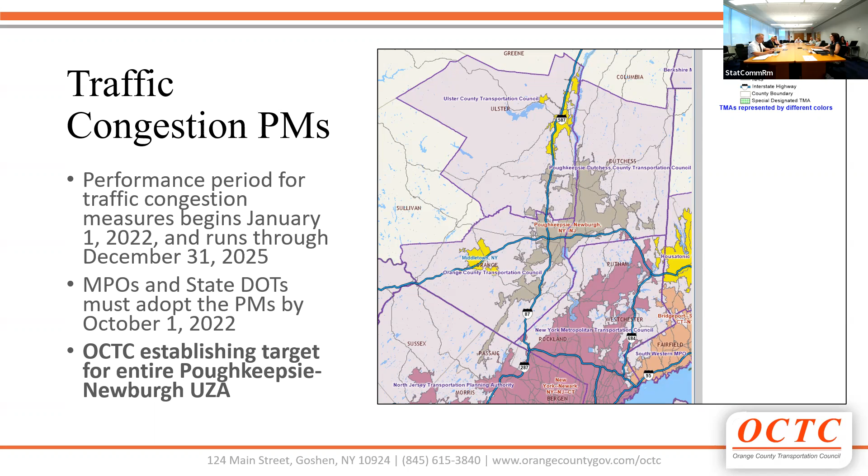And we are the only MPO adopting these for the entire urbanized area. So we coordinated with NYSDOT and the 3 MPOs that touch the boundary of the urbanized area, which are North Jersey Transportation Planning Authority, NJTPA, Ulster County Transportation Council, and Dutchess County Transportation Council. We met and talked about the approach and the draft, and they supported and felt comfortable with what we're presenting today. So the baseline is 2021, and then we have 2-year targets for 2023 and 4-year targets for the end of 2025.

The next measure is the peak hour excessive delay per capita measure. For this, we use the Avail Labs tool that uses NPM RDS data—I can't remember what that stands for—along with volumes from the HPMS, vehicle occupancy from the American Community Survey, and population also from the 5-year American Community Survey.

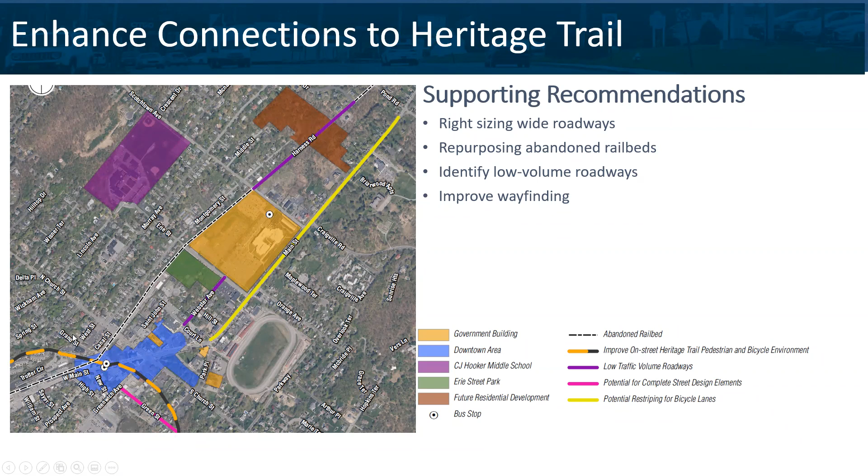And then you have more general policy recommendations, really working to adopt policies that promote pedestrian and bicycle amenities. So for instance, as new developments come online, are you giving credits to developments having bike parking, showers, travel demand credits to really reduce vehicular demand and allow people to bike and walk to work? And then even just streamlining the process to install a bike rack in front of someone's storefront—making it a very simple process—the quicker you get these bike racks out there, the more people will bike to work and park at work.

Next up, we're going to talk about some of the corridors. We did specific looks at the Route 17M corridor in Middletown, Route 211 in Wallkill, Route 94 in Chester, and then two intersections, the Route 17M Brookside in Chester, and Route 94 Main Street in Warwick. In general, whether you're on these corridors or other corridors throughout the county, there are recommendations we have that really can travel anywhere.

One is really encouraging places to adopt a complete street policy. This is important—one, there's funding opportunities when you have a policy in place; two, it sets the standard that as future projects or developments come online, there's an emphasis on making sure that they contribute to the complete street network within their city, town, or village. And within the report, Orange County actually has a really nice model write-up, so this is not something you'd have to do from scratch. There's actually a model policy that they put together, so if of any interest, you can reach out to OC staff and they can help you set up that policy.

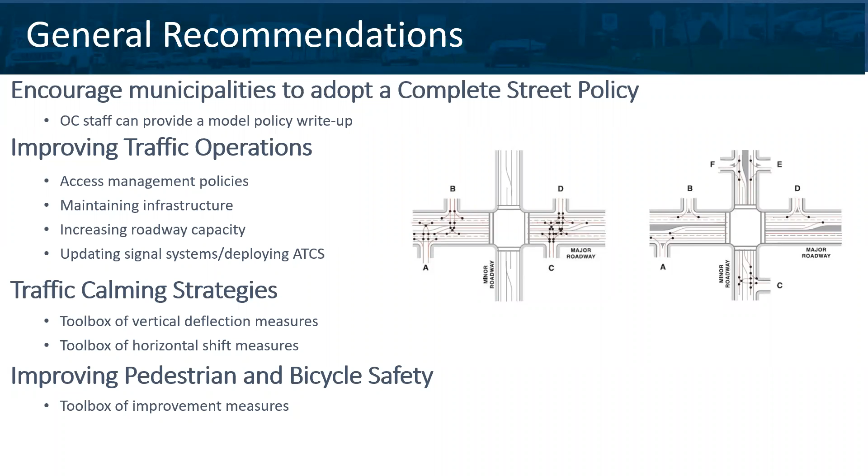And then within the report, you'll see traffic calming strategies, whether it's vertical deflection measures or horizontal measures, and pedestrian and bike safety measures. Again, it's all in the report—a toolbox you could pull from and implement on corridors throughout the county.

Just a couple of specifics—Route 17M and Dolson Avenue, we've highlighted where our study area was for Dolson Avenue. This was interesting because right now there's a lot of work going on: Dolson Avenue has a traffic operations improvement project and some sidewalk projects. So for this one, we really looked at where we could improve or build upon what's being done right now. One recommendation is, along that corridor, really encouraging shared driveway access as new development comes online, to reduce the number of driveways and friction along the corridor.

While there are projects right now to build sidewalks on the corridor, there are still gaps that remain. A couple we've noted are on Academy Avenue between Grant Street and Benton Avenue, and Academy Avenue between Benton right up to East Main Street. You can see in the images where there's a lack of sidewalks. There's also a stretch between Dolsontown Road and Campbell Plaza where there are no sidewalks.

Another big issue with this corridor is maintaining and updating pavement markings. A great example is in images from a couple years ago where a right turn had a through lane, a through arrow, a right arrow, a through arrow, which could cause confusion for drivers. These have been updated - the same image on the right shows more of this MUTCD standard through right turn markings.

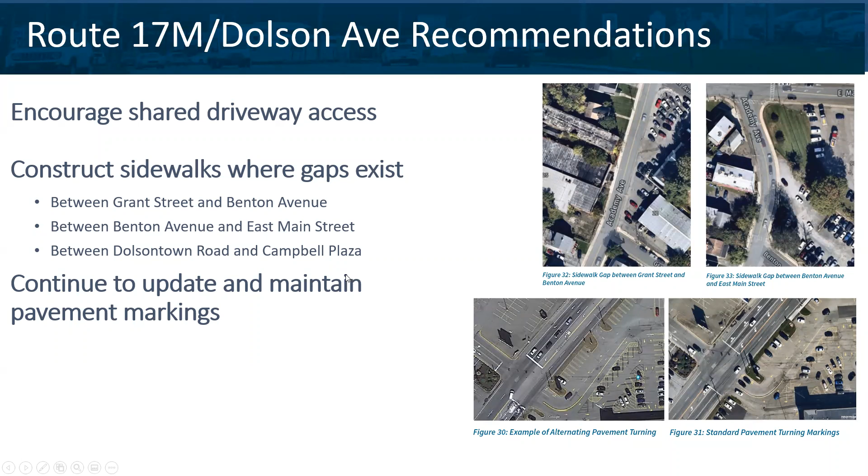Route 211, again, looking at from the Route 17 interchange to Goshen Turnpike. There are places along the corridor where there are no sidewalks. However, if you go out there, you could see what I would call 'goat paths,' where you can see there are people walking. So there's a desire to have these sidewalks in place.

Route 211 is a state road, so there will be some coordination between the state and the county. But even as highlighted in the picture, if you go out there today by the Route 17 ramps, you can see where people have walked, and we observe people walking along this area. That shows the desire for these facilities. There are also empty parcels along 211 that, as they get developed, present a great opportunity to start providing sidewalks on the project site frontage. And similar to the Route 17M corridor, we're encouraging shared driveways for adjacent land uses.

Along 211, we also looked at some of the intersections to see what we could improve. One was the 211 Galleria Drive intersection. Today, there's one left turn lane and 3 through lanes, and while not shown in the image, those 3 through lanes eventually neck down to 2 lanes.

We also noticed there was a heavy left turn up onto Galleria Drive. So one idea was converting one of those through lanes to a trap left turn lane, giving 2 left turn lanes and 2 through lanes, which would match up where the neck down occurs. This also creates at least a pedestrian median to facilitate new pedestrian crossings from the hotels and residential uses down to shopping and then transit.

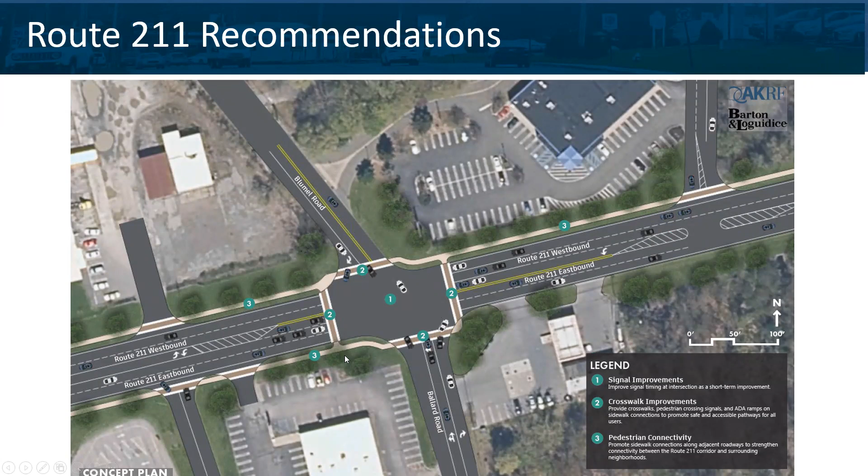At Ballard Road and 211, a lot of this involves both signal timing improvements and new crosswalks and sidewalks that we're trying to construct along the corridor. The function in terms of the turn lanes remains the same, but we're adding these pedestrian amenities along the corridor and improving signal timings.

At Goshen Turnpike, one problem we see is on the eastbound approach - today it's a shared lane, and the left turn will typically block through and right turn traffic. There are new developments coming online in this southwestern quadrant where we have opportunities to widen the roadway to create that left turn pocket.

New pedestrian facilities include sidewalks, crosswalks, and ADA ramps. At this deli, there's a lot of vegetation we've noticed on the corner, and when vehicles were taking a right on red, it really inhibited their sight distance. So we need proper sight distance at all 4 corners, particularly at the deli - again with sidewalks, crosswalks, and added capacity through its own left turn lane and a through right turn lane.

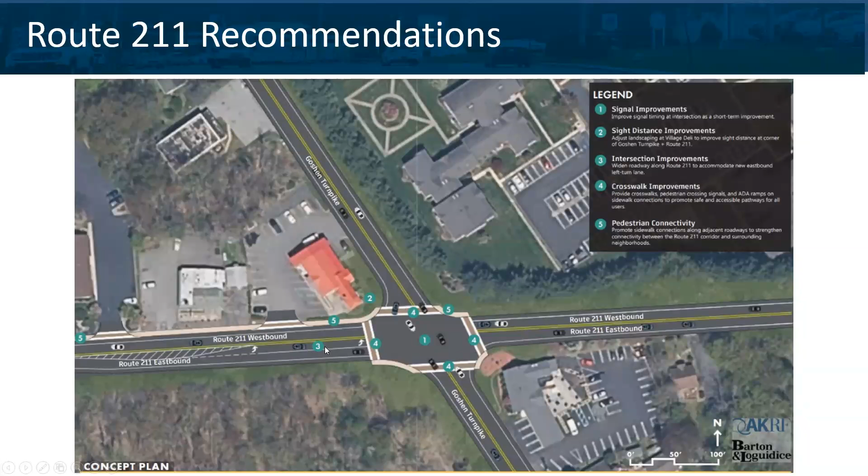A lot of times you use rectangular rapid flashing beacons, RRFBs, to make sure it's a safe crossing from one side of the street to the other.

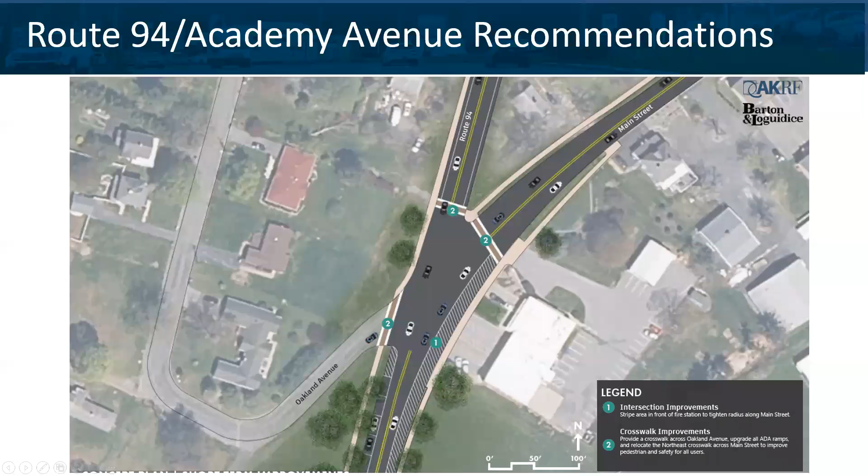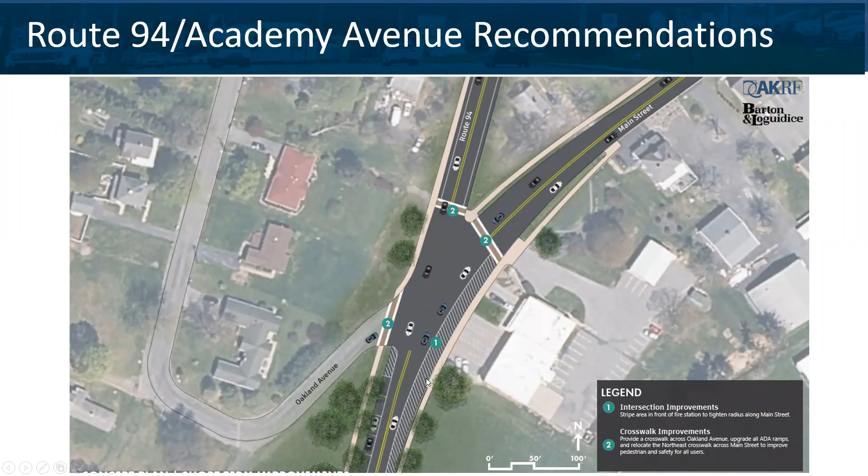So what we propose would really be restriping to direct traffic toward a slower right turn, giving better visibility for pedestrians as they cross Main Street, plus additional crosswalks on Oakland Avenue. But again, the big thing is restriping it so as not to inhibit fire truck access while still slowing down vehicles. You could take this a step further with multiple curbs too, but at least for the first low-cost option, you can do it through striping.

To go to some of our specific intersections, one is 17M at Brookside Avenue in Chester. Today, Lehigh Avenue comes in at this angle - you can almost see it in the aerial - where you have this very funky high-speed right turn to left turn, with a short distance between the two intersections. We saw driver confusion about where to go. So in this case, what we would do is realign Lehigh Avenue to turn and connect into 17 further to the west.

We also noticed that the bridge could use some repair - there's potholes, there's cracking. As we talked about earlier, any infrastructure improvements or maintenance are really important to keep traffic flow consistent.

Did you guys look into roundabouts?

We didn't look at a roundabout here because where this came in, it was still at an awkward angle where we couldn't get the roundabout to work. We did not look at roundabouts separately for these two. We do have trucks in this area, so we couldn't keep the roundabouts tight - it'd have to be a pretty large roundabout with probably some truck aprons. So we avoided the roundabout and left them as standard intersections, but further apart. Again, heavy truck traffic in this area, really no pedestrians, but where these came in, it was tough for us to get the roundabout to work with the trucks.

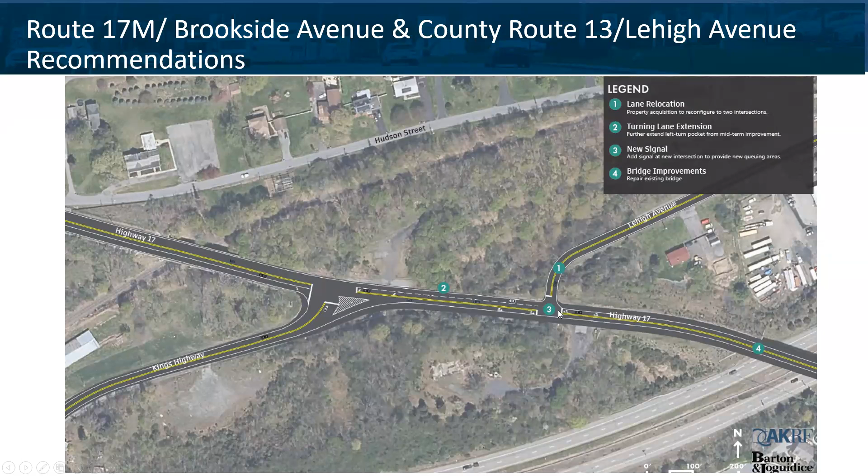And then Route 94 and Maple Avenue—there's actually a plan already in place by State DOT to improve this intersection, including crosswalks on all three locations. But today there's still this pork chop high-speed right turn. You can see where this green area is: there's a right turn that comes in front of the Historical Society building and continues, and there's only one lane for left and right turns.

So under this, building off of the state's improvement—and they were receptive to this—is creating more of a T intersection. Instead of the high-speed right turn that yields, it becomes more of a standard T intersection. You have opportunity for open space in front of the Historical Center, but now with shorter crosswalks and more traffic capacity for left and right turners. It just continues to build off what State DOT is already planning.

I know that was a lot very quick, but we want to go over one other section. We can always return to these corridor improvements.

And lastly, transit recommendations—there are two categories. One is the Middletown area. The recommendations dealt with expanding to accommodate hybrid or flexible demand-responsive service, but a lot of it really needs more post studies given what COVID-19 has done to travel patterns. We need to understand how people's work commute and mode share has changed, and whether what's there today for transit is competitive to driving.

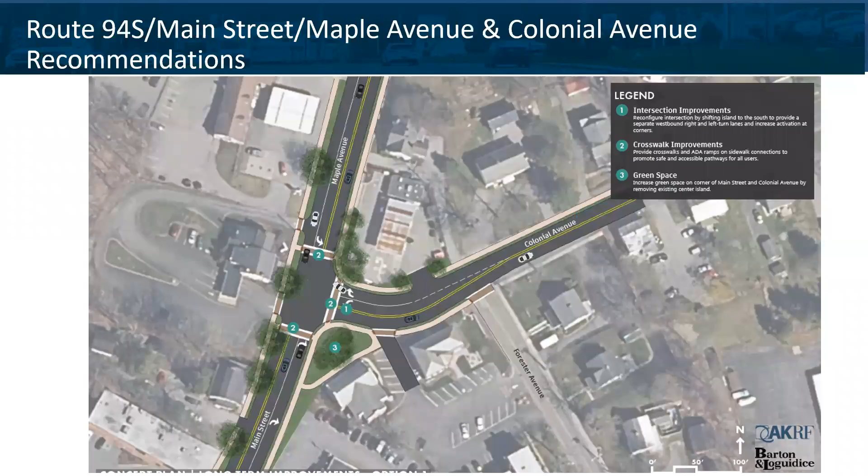Mike, thank you so much for that presentation. Again, I want to thank the Orange County Transportation Council, the Orange County planning staff for working with AKRF and the other consultants on this project. There's a lot of really good recommendations coming out of it.

One thing I'll mention before we start with questions is we're already starting to implement some of the recommendations. Most importantly, we've initiated a Middletown bus network redesign effort, which is underway, and that was a recommendation coming out of this study. One observation—when I tell people this they're surprised—is the bus service currently stops around 5 p.m. If you're trying to get people to and from their residence to work or to services, that really doesn't cut it. So we want to build upon and expand that system, and that study's underway to move that forward.

I'll turn it over to the council members. Any questions? I have a couple comments.

Thinking beyond this, did you consider opportunities to connect to the Empire State Trail? I saw a couple of segments. Let's get to that map. That might be a good long-term goal. I believe Trailway 6 would be the one that, if extended further north, would be the closest one that would hit the Empire State Trail.

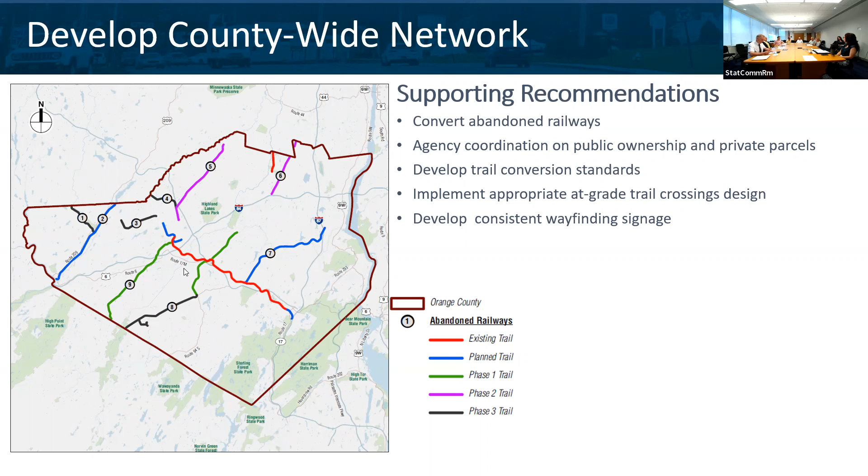That would be huge. And then I think the recommendations in here, as far as they relate to the state highways, are excellent. I do think some of them, when you're talking about congestion a little bit, left turn lanes and stuff, I'll want to take a look at those closer.

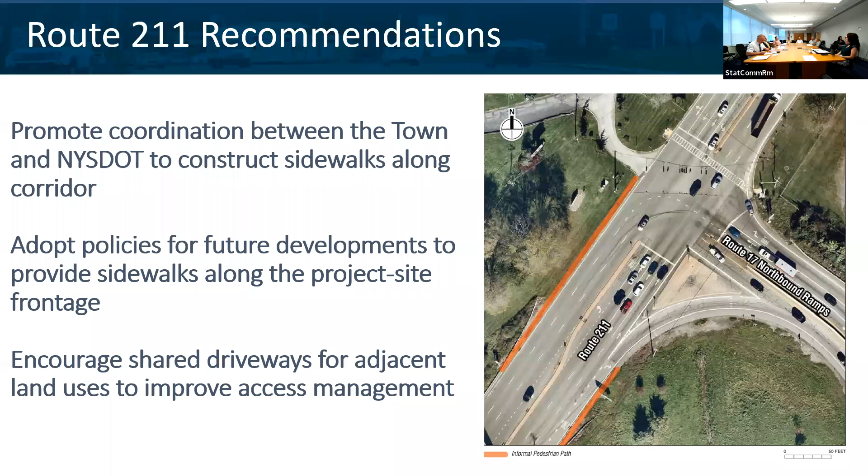The one for Route 94, what town does that go through predominantly? Village of Chester. Are they here or not? Because what I'm seeing there is, I don't know how interested the town of Chester is in TAP applications or pursuing these types of improvements. But this study and those drawings would really help with the TAP application.

We did similar work for the village, or I think it's the town of Hyde Park. And really, my experience has been that a picture is worth a thousand words in these grant applications. Because you tied so much together on 94 in that village, that would be really strong. And taking it one step further, this table is probably going to be distributing, soliciting for projects. There are some really good suggestions in here.

I don't know how that's going to line up with the funding that's made available, especially through all these other new programs that might be coming forward. But it's really nice. So is this draft right now, or okay?

Yes, it's draft. Our plan was to distribute it to the council for review and comments, and then move forward with finalizing it and having the Transportation Council adopt it. Yeah, as soon as I can get a copy, the better. So we just have a planning process back in our office where we can go through and make sure these recommendations are getting on the right people's radars, not that it means there's going to be a project next year, but so that they're aware they've been studied and there are recommendations. Okay, great.

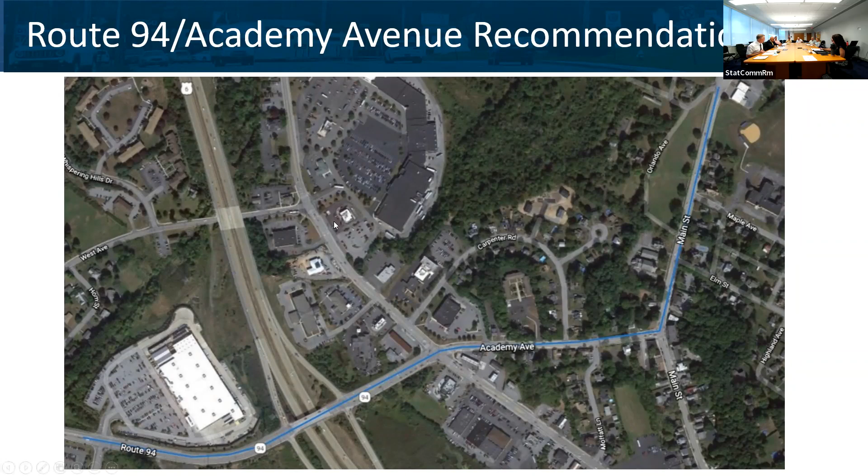Any other questions? If not, are there any other member reports? Well, Middletown, the traffic operations project is moving along very well. We're only going to be delayed in paving, which is not a big deal, not really in the critical path of the project. And DOT came and conducted their first audit last week, so everything seems to be in order, and it's moving along very well.